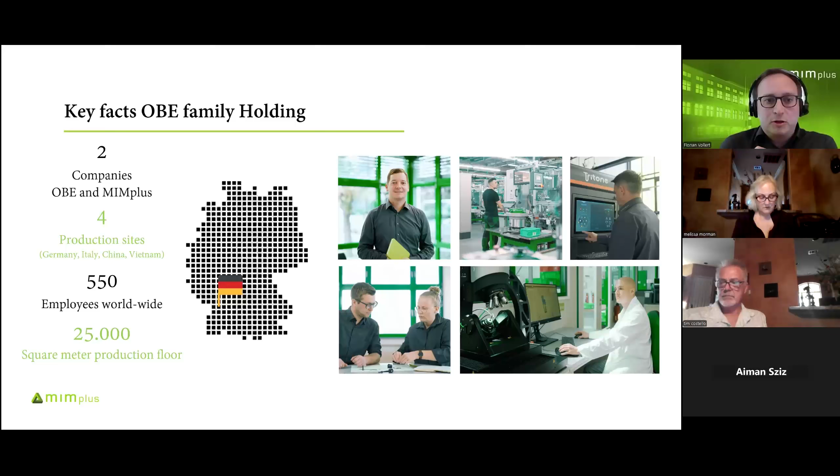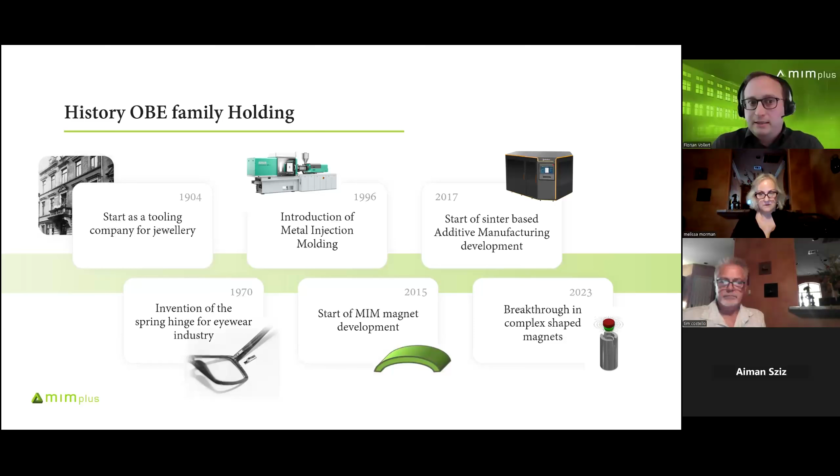We have around 550 employees worldwide and a production floor of 25,000 square meters. I would like to give you a short overview of the history of MIMplus. We started more than 120 years ago, in the year 1904, as a tooling company for the jewelry industry, which was at that time very big here in Pforzheim. Then in the 30s, we transferred from a solely tooling company to a company that was producing high precision products. For example, at that time, we produced small gear wheels for the watch industry that you can find in watches.

Then World War II hit. After World War II, there was a time of reconstruction. And in the 50s, we had what we refer to here in Germany as the economic miracle. At that time, the company was growing very fast, and we had a wide variety of different products. One of the most promising products at that time was hinges for the eyewear industry, so we were focusing more and more on that product. And in 1970, we invented and patented the spring hinge for glasses, which is used up until today. For example, I'm wearing glasses and I have this kind of hinge. I think we all do. Yeah, that could be.

In 1996, we introduced the metal injection molding process as one of the first companies here in Germany. The reason for that was that the demands from our customers from the eyewear industry became more and more challenging. And with this technology, we were able to produce complex hinges that were not able to be produced before.

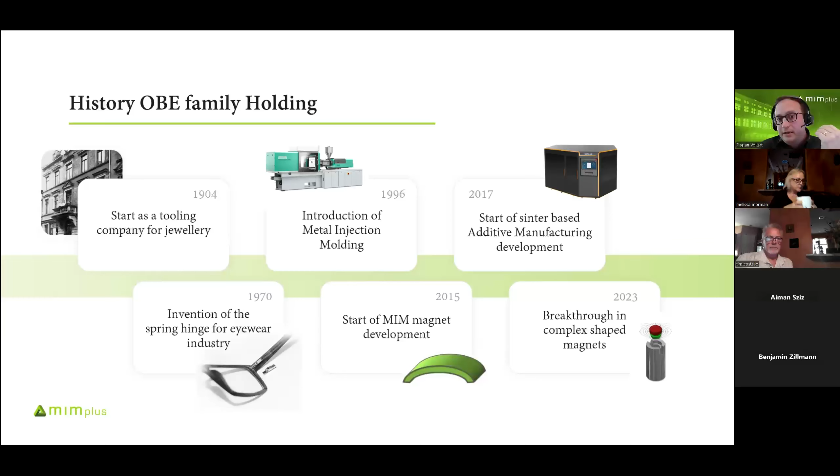And in 2023, we then had our breakthrough of complex shaped magnets produced via metal injection molding. And we refer to it as our breakthrough because at that time we were able to produce for the first time MIM magnets that were comparable in their magnetic properties to a pressed sintered magnet.

Which is just incredible. Because injection molding magnets has been around for a while, but it's kind of like bonded magnets and flexible magnets and all these other kinds of magnetic materials where, yeah, you can make them, but they're not very good. They're weak. The coercivity is poor. Yep. And I think that's the major breakthrough of how do we do injection molding of magnets, get complex shapes, and yet also end up with a really good magnet.

Yes, and it's not easy. So when you look at the history, it was 8 years of constant development. But I will come to that a little bit later, to some of the challenges. Some key facts about the company. We have a wide variety of different customers from different industry sectors, for example, medical, automotive, aerospace, mechanical engineering, luxury, consumer industry, just to name a few.

Our core technologies are, of course, metal injection molding, and also to cover the smaller quantities, we have the sinter-based additive manufacturing since 2017. We have a very well-equipped lab for R&D, and we have in-house our own tool shop that produces our toolings for the MIM process. We have various post-processing possibilities in-house, for example, milling, surface treatments. We have an in-house galvanic that does the coatings of our magnets, for example. And for what we cannot do in-house, we have a network of leading suppliers.

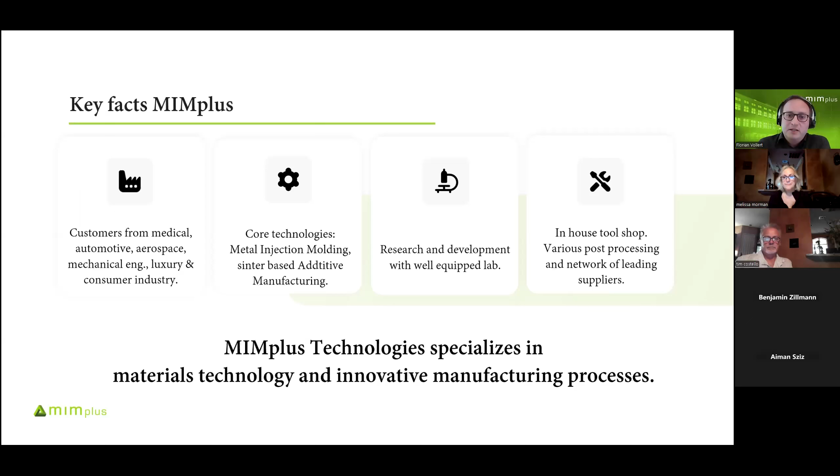So to conclude, the company MIMplus Technologies specializes in materials technology and innovative manufacturing processes. And this is also the reason why, compared to the size of our company, we have a really big R&D department. We have a very close correlation to different universities here in Germany. So we more or less constantly have interns from these universities and also offer to do bachelor or master theses here in our house.

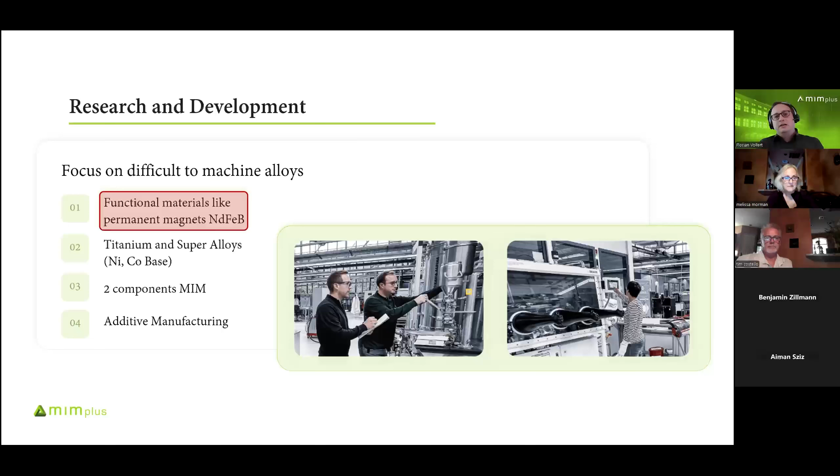The focus of our R&D department is basically on difficult to machine alloys, which could be functional materials like the neodymium iron boron magnets, which I'm talking about today, titanium and superalloys, two-component MIM, and the additive manufacturing. And yeah, today I will focus on the permanent magnets produced via metal injection molding. So this gives you an overview of why we are doing that kind of magnets.

Basically, what we want to do is combine the advantages of the two conventional production methods, which are press and sintering and polymer bonded magnets. Neodymium iron boron press and sintered magnets are the commercially strongest available magnets on the market at the moment. But they can only be produced in relatively simple shapes.

On the other hand, we have the polymer bonded magnets. Here we have a very high level of design freedom, but when you compare the magnetic properties, they are significantly lower than a press and sintered magnet.

Dr. Florian, you got to be careful when you say something like design freedom with a guy like me because I'll design anything. You know, okay.

That was always my problem. Once you told me I had design freedom, then we were in trouble. Yeah, maybe we can talk about that a little bit later, about the restraints in our process. But

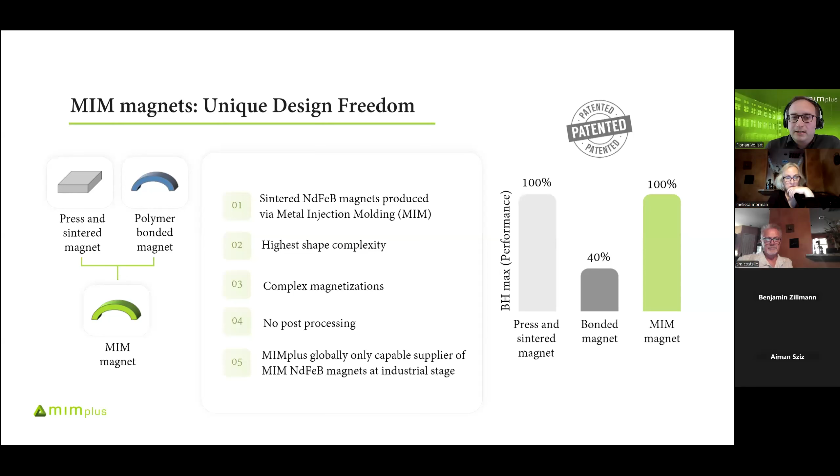And at the moment, to our knowledge, MIMplus is globally the only capable supplier of MIM neodymium iron boron magnets at industrial stage. Here I have some examples of what could be possible to realize via the MIM process. But the problem is that we are working together with a wide variety of different customers, but we are not allowed, of course, to show their designs. So I have to alienate them a little bit. Yeah, we're very familiar with that. Yes.

So on the one hand, MIM is very suited for very small parts. So we can produce tiny magnets. The minimum wall thickness that we realized was 0.4 millimeters. Then, of course, MIM is suited for complex shapes. Here I have some examples. This is a holding magnet from the furniture industry. This is also a holding magnet from the electronic industry. And this is also a holding magnet with a cutout for a sensor and a cable routing.

We are also able to produce multipole magnets, and we are producing magnets for e-motors. And this is an example what would be possible to introduce to your magnet. These holes are cooling channels. Then we have this dovetail, I think it's called like that in English, and a groove in order to be able to attach the magnet. Just to give the listener some ideas of what would be possible with the MIM process.

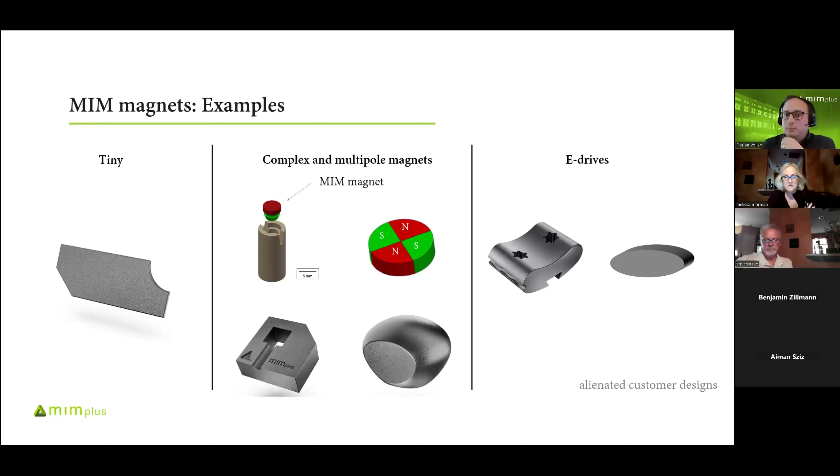But we are not only capable to produce magnets from virgin material, but what we can also do is we can use end-of-life magnets and recycle them. We have the complete technical capability to do so in-house. And yeah, the plan is to establish a closed loop of magnet recycling in the following years, and therefore we are constantly involved in public funded projects and research.

Florian, I'm going to ask this question now because you talked about raw materials. Your supply chain of raw materials, I take it the majority of your raw materials, powders, all come from China because everybody's do. Do you also have additional supply streams coming from other locations other than China? Yeah, looking at what's happening in the world today, that's a very important topic. And at the moment, we are trying to establish other supply chains apart from China. But to be honest, at the moment, we are at the very beginning.

Yeah. And then the recycled material supply chain, those are magnets that somehow are recycled within the European community. Because the European community has kind of taken the lead worldwide in end of life goods recycling, circular economy kind of work, I take it there must be some market then for magnets in the European Union. Yeah, there is. But to be honest, with the recycling at the moment, we are at a prototype stage. We need still some time to go into serious production with that.

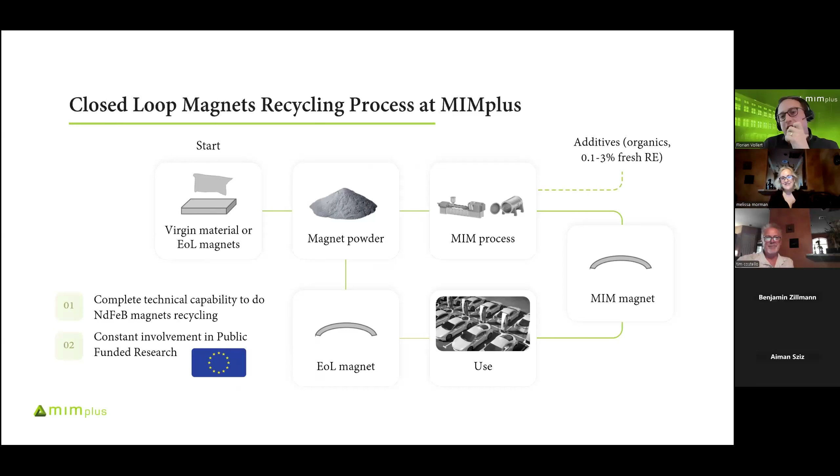...keep them out of landfills, and

Okay. So this is an overview of our complete process chain. What we did in the last years of the development of our process was optimization of nearly every process step in order to achieve a magnet grade that is comparable to a pressed and sintered magnet. What is also important to know is that from the powder production up until we have the sintered part, we need oxygen-free conditions. Neodymium has a really high affinity to oxygen, and every ppm of oxygen that we have in our final magnet will reduce the magnetic performance.

So what we do, we start with our virgin material or our end-of-life magnets. For the end-of-life magnets, we have a pre-processing step, which includes, for example, the removal of the coatings. With the virgin material, we can skip that step and go directly to powder production. The powder is then used to produce a feedstock that is flowable and can be used for the shaping in the injection molding machine. Then now comes... Yes, I'm going to interrupt again.

This affinity for oxygen, that's not unique to your process, though, right? Yes. Any process that involves powdered neodymium has this challenge with oxygen, right? Yes. Now, do you see everybody in the industry using inert gas in an oxygen-free environment throughout processing, or do they manage it in some other manner? I cannot talk so much about other industries, but I know that others, especially when you don't do near net shape, don't have a completely oxygen-free environment, because then they cut out the magnet from the middle. But in our case, we definitely need that. Yeah.

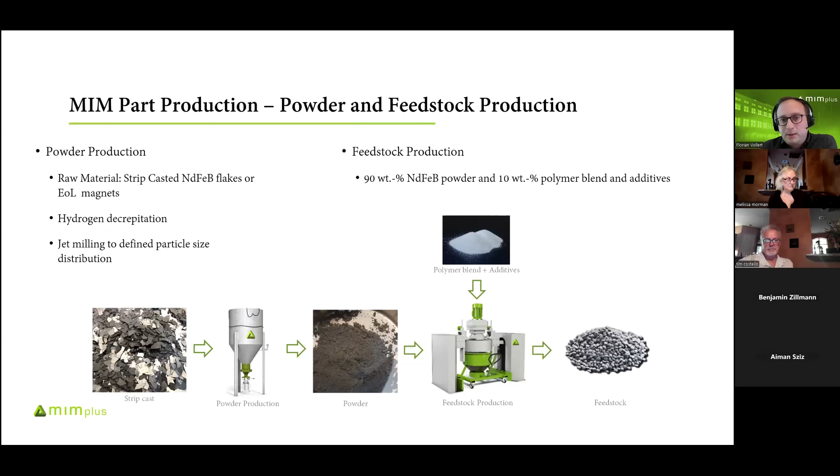The next step would be the feedstock production, and that's what's different compared to a press and sintered magnet. We take the powder, put it in a specially designed compounder, and mix it with a polymer blend and other additives in order to get our feedstock. This feedstock can then be used for the shaping process. Therefore, we use conventional state-of-the-art injection molding machines. And with our in-house tooling shop, we manufacture specially designed toolings that have an internal magnetic field.

The reason why we need that field is that neodymium iron-boron has a magnetocrystalline anisotropy. That means that it has a preferred magnetization direction along a specific crystal axis, which is the 001 direction. Then I think that's absolutely critical. Your ability to introduce these fields, especially in different areas of the net shape magnet, is critical so that you don't end up with just an isotropic type of material.

Because a lot of interesting things have been done with magnets, but they either end up with bonded magnets or they end up isotropic, which means you're not going to get really strong magnets. You've solved all of those problems where not only have you gotten rid of the binding material, but you've also been able to align the domains such that they optimize whatever the function is. Exactly. And that's also something we always have to explain to our customers, because the degree of alignment is really critical with regards to the remanence. So we need to achieve a very high degree of alignment to achieve a high remanence in our magnets.

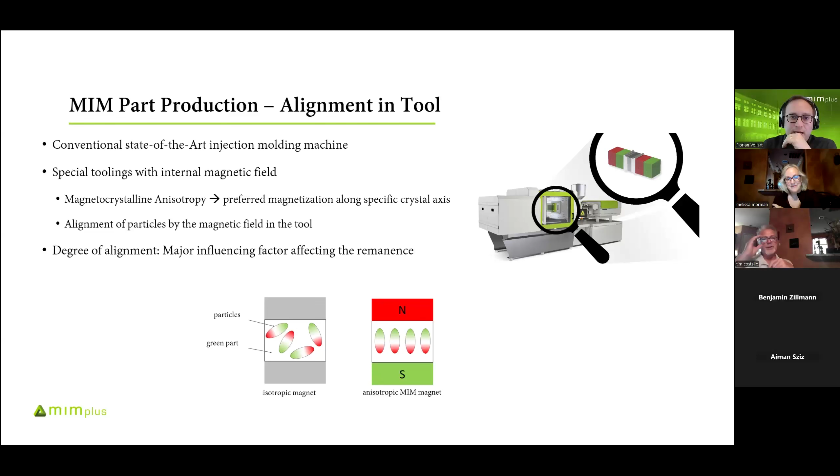Yeah, I remember when we were in Amsterdam, I was talking about the ability to create a monolithic Halbach array, because you have the ability to align your domains differently throughout the injection molded part. And then, of course, the question is, how would you magnetize it? And if those interstitial domains are aligned at 45 degrees rather than 90 degrees, then there's a chance that we actually could magnetize those vertically and at 45 degrees, creating an effective monolithic Halbach array in one magnet, a single piece. I don't think that's ever been done by anybody, and it would be an interesting piece of R&D work to do. Yeah, that will be my next slide.

But back to the alignment. We did some investigations via EBSD scans and also via X-ray diffraction in order to see how our alignment works. From these experiments, you can extract a lot of parameters that describe the alignment in the magnet, and the result is that we are comparable to a press and sintered magnet with regards to our alignment.

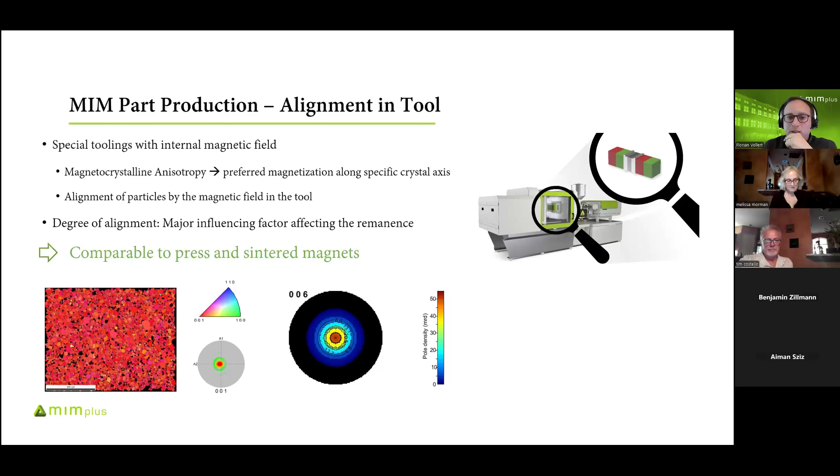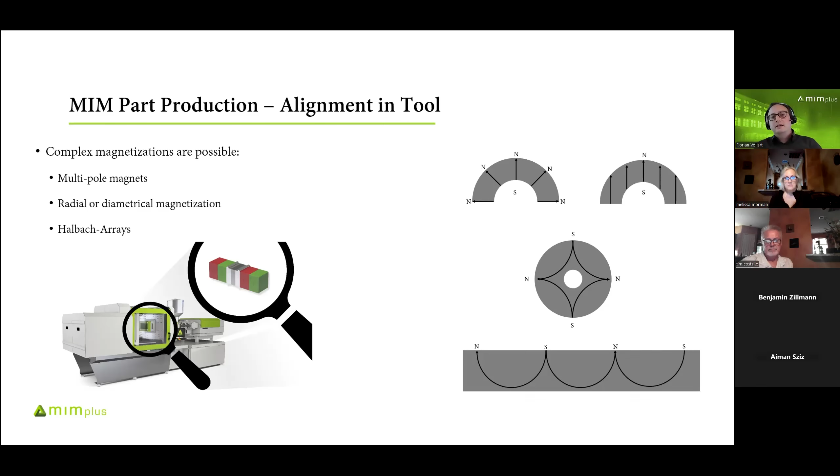And what you said before, Tim, was with the Halbach arrays. So that would be also possible to introduce an alignment to get a Halbach array, a monolithic Halbach array. Then after the shaping, we have the debinding step. And it's really crucial to remove nearly 100% of our binder. And that's also a lot of development work we had to do in the past.

Our guess is that at that point, the hard magnetic Nd2Fe14B phase is disintegrated by the carbon, resulting in a shift to other areas of the phase diagram, which could lead, for example, to iron phases that are not wanted in the magnet. And these contaminant phases then act as nucleation points for reverse domains. So it's really crucial to remove the entire binder from our magnets in order to get good magnetic properties.

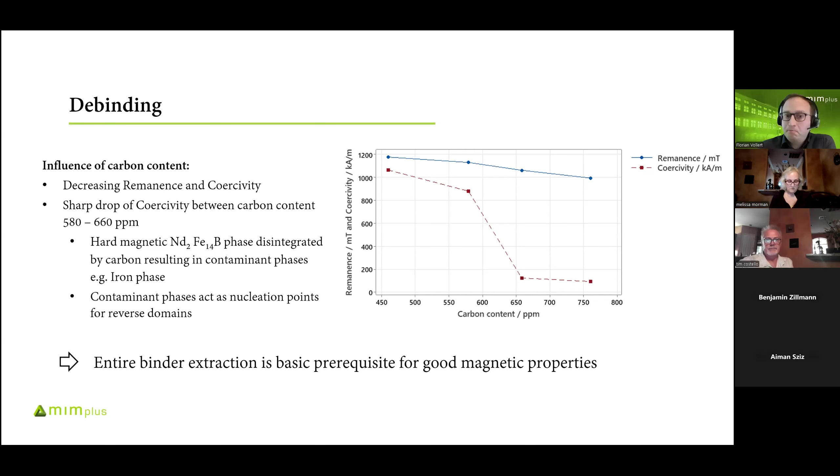Then we have removed our binder, and then it's possible to sinter our part to full density or nearly full density. And yeah, this is basically the main challenge to remove the whole porosity from our magnets, because this is also a crucial influencing factor on our magnetic properties, especially the remanence.

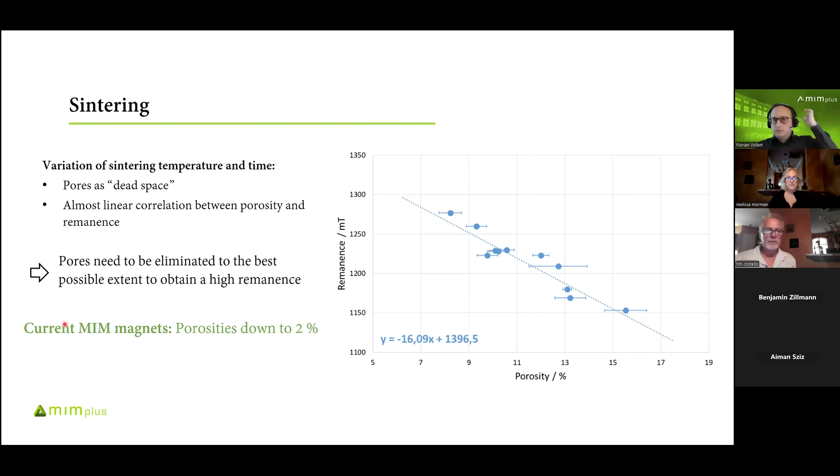These are also some experiments I did a few years ago. This is the correlation between the remanence and the porosity. You see an almost linear correlation because the pores act as dead space and do not contribute to the magnetic flux. And so it's really crucial to eliminate the pores to the best possible extent to obtain a high remanence.

Well, and because you're injecting complex, three-dimensional shapes, there's a lot of science here of how you end up with your final net geometry. If you didn't care about tolerances, it would be one thing. You could smash and bake and do all kinds of stuff to eliminate this, but you're trying to hit an end tolerance on a three-dimensionally designed and toleranced part. So the science of that is really also a special sauce of MIMplus.

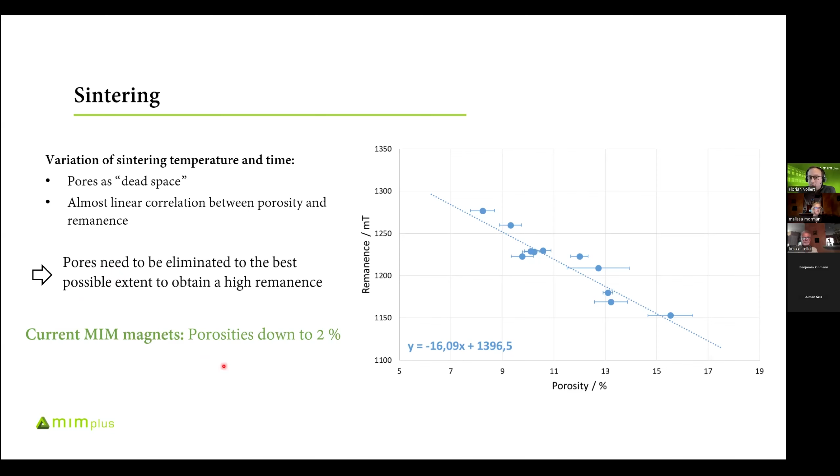Yeah, and also now we are really able to achieve porosities down to 2%. And this is also comparable to a press-sintered magnet. Okay, now our magnet is sintered. We can do some post-processing and the magnetization, and now we have our MIM magnet. And now it's of course interesting, what are the properties?